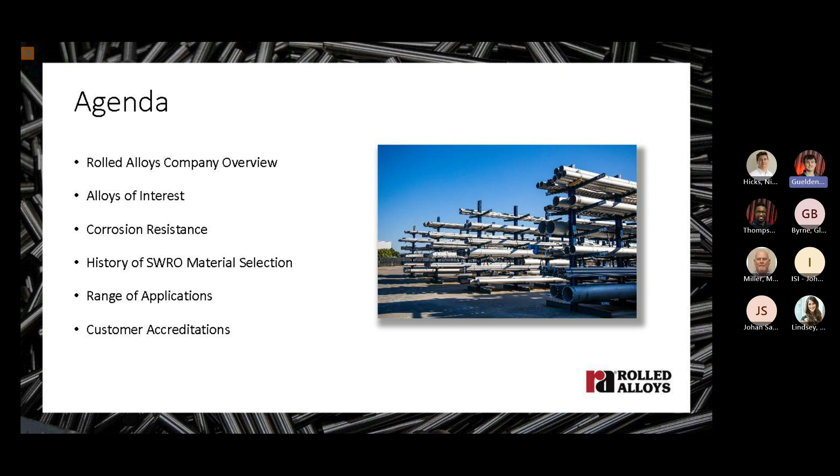Today's topic, we will be talking on material selection for saltwater reverse osmosis feed lines, as well as brine reject lines. Today's agenda, we will talk about Rolled Alloys as a whole and what we do here, some of our alloys of interest for this application, some corrosion-resistant alloys and how they respond in this environment, some history on saltwater reverse osmosis materials, a range of those applications, and some customer accreditations.

Thank you. So I'd like to talk now a little bit about the alloys of interest. This is a listing of the compositions of austenitic and duplex grades of steel that are commonly used in seawater reverse osmosis applications. The pitting resistance equivalent number of each of these grades is shown in the column at the end of the table. And this is the result of the calculation detailed in this equation below.

The PREN is essentially an empirical relationship that's derived from the regression analysis of the composition of stainless steels and the results of their performance in corrosion tests in chloride environments. It's a useful characterization of pitting and crevice corrosion resistance of different grades of steel. The alloys highlighted in yellow are the most seawater corrosion resistant in the group, and they all have high PREN numbers; they consist of a couple of super austenitic stainless steels and a couple of super duplex stainless steels.

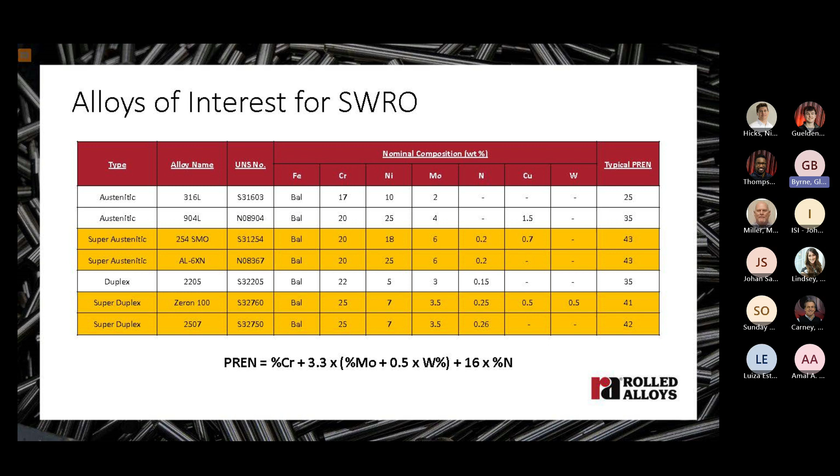Okay, let's talk about corrosion resistance a little. When we plot the pitting resistance equivalent number versus the critical pitting temperature, we find that as the PREN increases, the critical pitting temperature increases too. This is in a linear fashion, as you see in this graph. This is also true if we measured the critical crevice temperature. This trend holds for most oxidizing chloride solutions.

Initially, the PREN equation was percent chrome plus 3.3 times percent moly. When new nitrogen-bearing alloys were developed with improved corrosion resistance, a term for nitrogen was added to the equation, and similarly when tungsten-bearing alloys became available. For example, Zeron 100, which contains between 0.5% and 1% of tungsten, moves to a better fit position against the regression equation when tungsten is utilized in the regression analysis and the PREN equation.

But just to set the scene, I was born in 1957, but it wasn't until the late 1960s that AOD steelmaking, that's argon oxygen decarburization steelmaking, allowed us to make good stainless steel economically. So good stainless steelmaking practice began when I was about 10 years old. Similarly, the first RO membranes were developed in California in 1959. The development and understanding of both stainless steels and membrane technology occurred more or less in parallel, and both technologies are about as old as me.

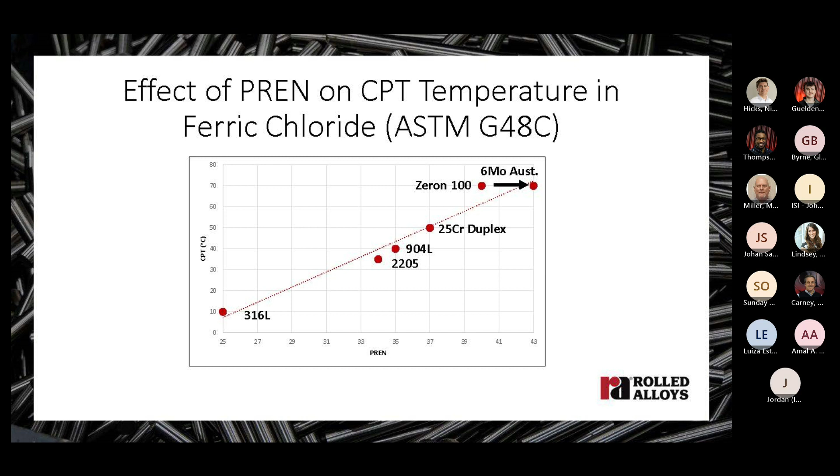In this next slide, I show the generally accepted safe use limits of chloride for these alloys of interest. These are considered to be good rule of thumb figures. 304L, for example, the red line, is good up to about 200 ppm chloride, but performance between 200 ppm chloride and 1000 ppm chloride is limited. 316 is good up to 200 ppm to 1000 ppm chloride, as you see here. And 2205 and 904L is good from 1000 ppm chloride to about 3600 ppm chloride. Above this limit, you rely on 6% molybdenum superaustenitic stainless steels and 25% chrome super duplex stainless steels.

But of course, these limits are subject to some provisos that I also refer to in the slide. There's presence of other species in solutions, the severity of crevice, the fabrication practice, microbiological activity, and limits of chlorination. This is too much to go into for the purpose of this discussion, but the references that I refer you to in this section give you some good background information. For example, the more conservative limits that I show here for 304 and 316 arise when some of the provisos detailed here work against you.

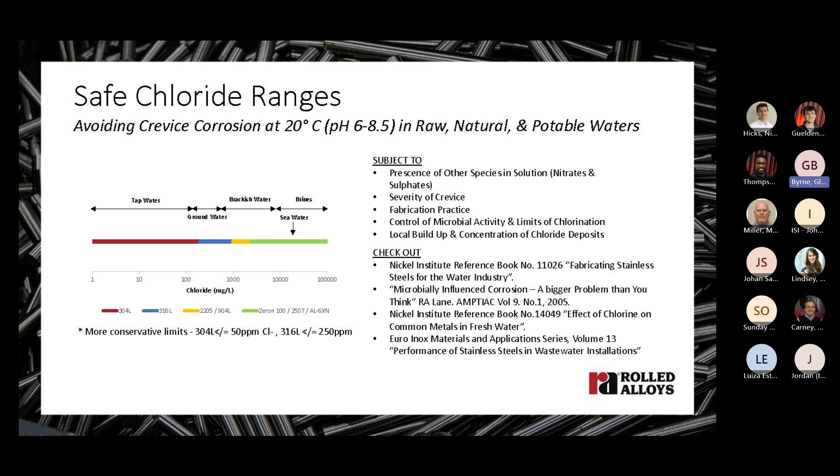The figure on the left shows the potential of stainless steels in seawater, how it varies with water treatment. This is important because the higher the potential, the higher the risk of pitting and crevice corrosion. The figure on the right is a schematic representation of a seawater reverse osmosis plant. For a stainless steel in natural seawater, the potential is about 300 millivolts versus the standard calomel electrode once the biofilm has formed. If the seawater is disinfected continuously with about half a ppm of residual chlorine to prevent fouling, the potential is typically plus 600 millivolts, as you can see here.

And this actually prevails from the seawater intake, because chlorine is usually added through the intake pump, up until we get to this point where the chlorine is neutralized. So this condition, 20,000 ppm at 600 millivolts of potential, prevails up to this point in the system. The chlorinated feed then has to be dechlorinated before it reaches the membranes, as the membranes are normally chlorine intolerant and would be oxidized. This gives a high salt passage into the permeate that you don't want.

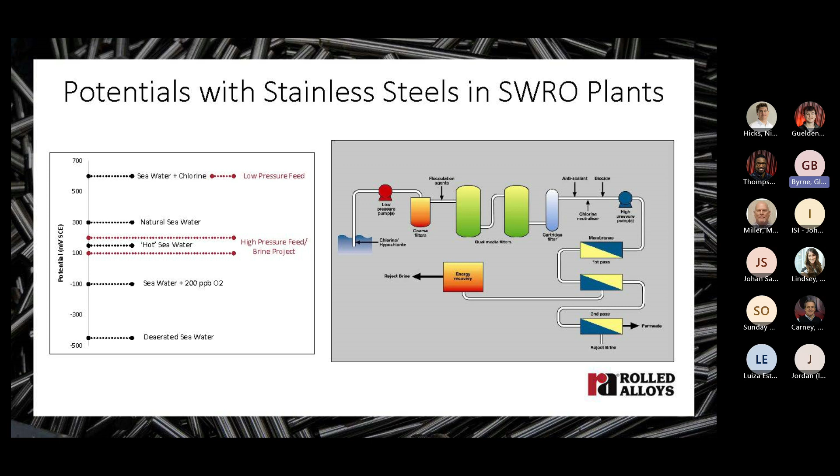So a little about some of the history of seawater reverse osmosis. I'm really looking at plants that were being constructed in the Middle East and elsewhere in the early 1980s in this slide. Grades like 316 were being promoted for seawater service, and there was little or no pilot plant testing of the materials. Industry focus was on membrane performance, energy usage, pre-treatment, etc. There was nothing with respect to materials of construction or pilot plants. You can see from the table that unlike Shell, this industry's alloy selection strategy was to do this by rote, starting with 316L and escalating alloy content and cost until a satisfactory level of corrosion resistance was realized.

And you can see this in the Saudi progression of projects. I've highlighted these in blue. So the early Saudi projects, 316 and 316 here, didn't work out so well because they suffered pitting and crevice corrosion. So they were moved to the next alloy up, 317. That suffered crevice and pitting corrosion, and then they gravitated to 6% molybdenum alloys by around 1986. So from 81 through to 86, it was trial and error, but the 6Mo worked quite well.

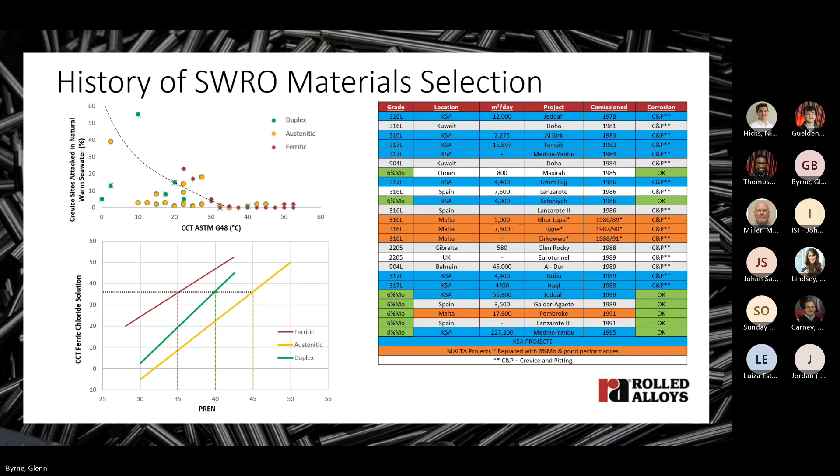Better technical understanding of what was required of stainless steels for seawater service, the super duplex stainless steel service history as pipes in oil and gas seawater cooling and fire protection systems, and as castings in seawater pumping applications, as well as its higher design strength and its significantly lower cost than 6% molybdenum alloys, contributed to its acceptance for seawater reverse osmosis applications.

This realization also coincided with a technology transition in the industry and a move from MSF and MED to seawater reverse osmosis technology. Seawater reverse osmosis was increasingly more energy efficient, cost effective, and scalable. The new plants were generally bigger than before, 100,000 to 300,000 cubic meters a day, and there were more of them. So the installed RO capacity of both Zeron 100 and 2507 soared over this time period, while the utilization of 6Mo tended to lag. And this is primarily because of their lower cost. The super duplex alloys tend to be about 30% lower in cost than the super austenitic stainless steels.

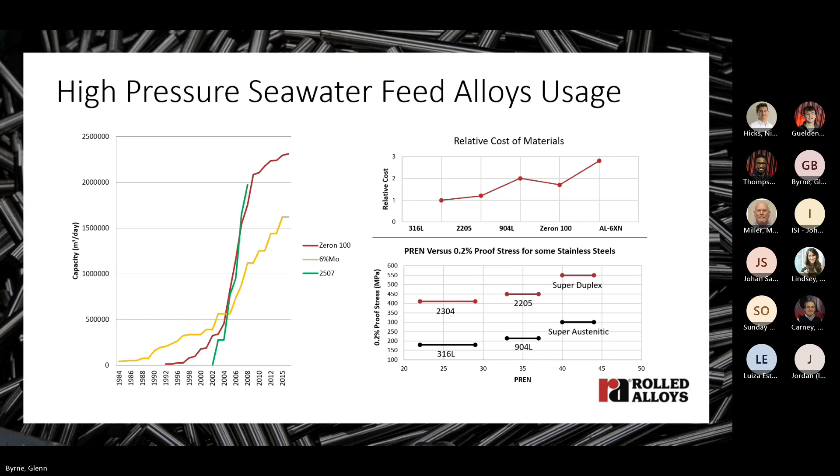Our installed capacity for Zeron 100 and 2507 as Rolled Alloys now exceeds 2.7 million cubic meters a day, and you can see the timeline for this installed capacity incrementally growing over the years.

We have installations around the world, and indeed we have almost 1 million cubic meters a day, or 902,000 cubic meters a day, installed in the Middle East, which is a very arduous application. We've supplied, in fact, 10 projects in the UAE since 1999 through to 2022, as shown in this picture here, with a total capacity of 413,000 cubic meters a day.

So this side here is the Persian Gulf. This side here is on the Gulf of Oman in the UAE. Now, typical Persian Gulf seawater temperatures are in the range 20 to 35 degrees C, and salinity is about 4.5%. This compares with Monterey Bay in California, where the seawater conditions range from 10 degrees C to 19 degrees C, with a salinity of 3.3%. But seawater intake temperatures are not always at ambient.

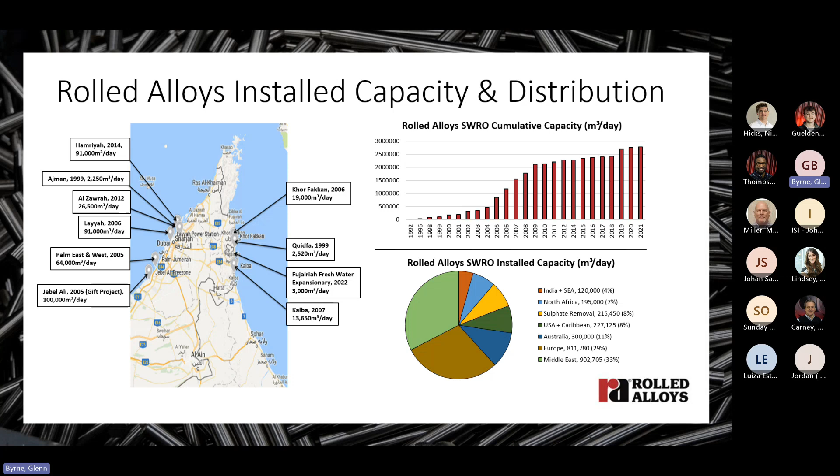So let's talk a little bit about applications. Our applications range from pilot plants like this one that was installed in Long Beach years ago, to small size plants for hotels and golf courses, holiday island resorts like this one in Adeje in the Canary Islands, and other coastal towns. We also supplied medium-sized plants for power stations in the Philippines and industrial independent water suppliers in the Kingdom of Saudi Arabia and the United Arab Emirates.

We've also been involved in a number of significantly larger plants between 100,000 and 300,000 cubic meters a day for municipal jobs in the USA, mainland Spain, Algeria, India, Morocco, Kingdom of Saudi Arabia, UAE, and Australia. We also supply plates for cartridge filter vessels and filter baskets, and pipes to energy recovery equipment manufacturers and pressure vessel manufacturers to make these side ports that are set into the vessels, and these are deployed on many projects around the world.

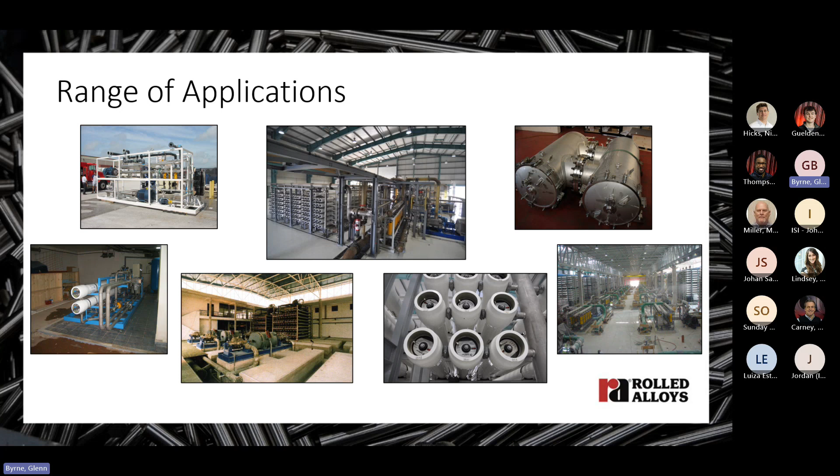This is some information on what we found to be a challenging project that we completed in 2019, and from a logistics point of view, it was very challenging. It consisted of 1,200 fabricated super duplex stainless steel spools with a capacity of 237,000 cubic meters a day. Sets of pipe spools were distributed across eight job sites down the west coast of Saudi Arabia, on the Red Sea coast, and specific numbers of spools were supplied in a phased delivery schedule to each of these job sites to meet a strict fabrication schedule.

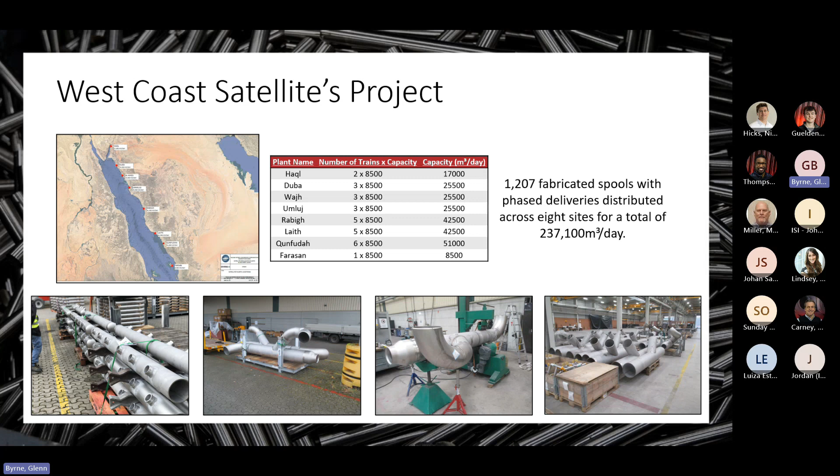So 6% molybdenum alloys and super duplex stainless steels have performed well in our applications around the world, but they're not immune to corrosion in seawater. Crevice corrosion at couplings, at threaded connections and at flange faces, and pitting corrosion of welds can be an issue. It can be relatively trivial, but it can be more serious.

The relative cost of super duplex stainless steel is about twice that of 316L. For 6% moly alloys, the price is about 2.8 times 316L. The next generation of high alloy stainless steels and nickel alloys are 5 to 8.5 times the cost of 316L. And this precludes their use in place of the more affordable duplex and super duplex stainless steels.

Now, seawater corrosion testing shows significant scatter in results because there are numerous contributing factors controlling the initiation and propagation of pitting and crevice corrosion. Probabilistic algorithms have been developed to try to model this behavior, but this is for the academics. The stochastic nature of the problem means that adherence to best practice in manufacture, heat treatment, acid pickling, and fabrication of these pipe spools can be very cost effective in minimizing the risk of corrosion.

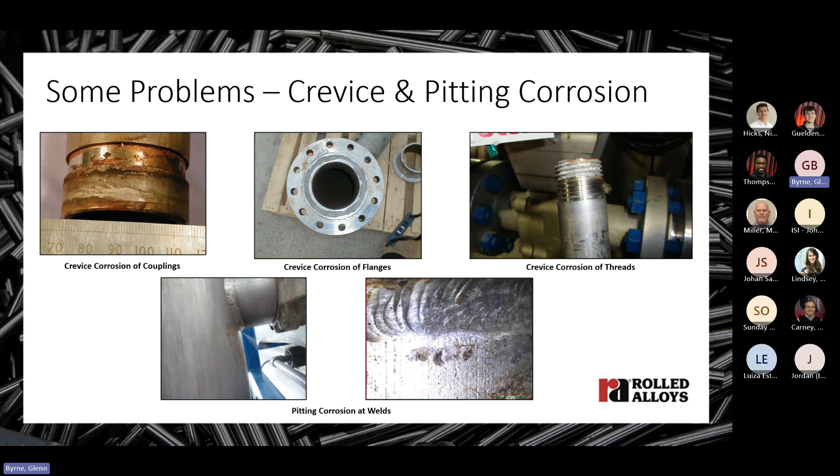We've had repeat business from many of these customers over the years, and they've increased the capacity of existing plants or built new ones. So I hope that I've demonstrated that Rolled Alloys have a specific expertise and highly experienced supply chain capability for seawater reverse osmosis projects. We can deliver quality materials of construction and technically support the scope of supply, and we'd welcome the opportunity to work for you in this market.